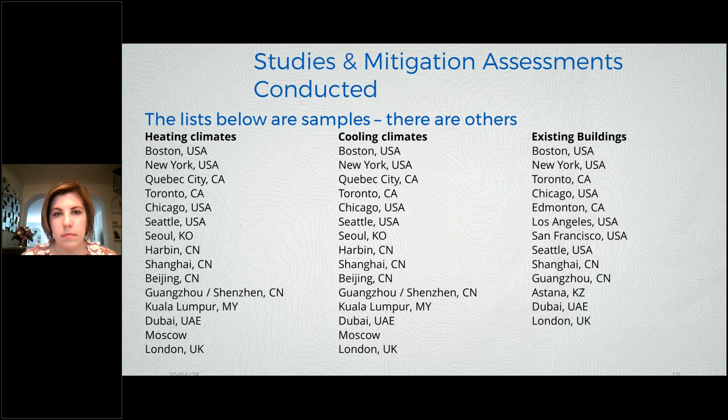I should note that I'm trying to be bilingual on our units. So there will be places where I think I've got every spot that there are IP and SI units, but if I slip up and miss one: 50 pascals is the same as 1 pound per square foot, 250 pascals is the same as 1 inch, and 1 inch is about 5.2 PSF. There's a little bit of rounding going on there, but those are basically the numbers. So 1 inch is 250 pascal, 1 PSF is 50 pascal.

And usually when we're naturally ventilating, the interior space is slightly warmer than outside. Even in a hotter climate, this is usually true. And so air wants to come in at the bottom and leave at the top. It's that delta P created by the indoor-outdoor temperature difference that starts to drive this force.

The issue with stack effect, though, is that there's really a driving force, and it's very difficult to get rid of that driving force. We will talk a little bit about how to get rid of it.

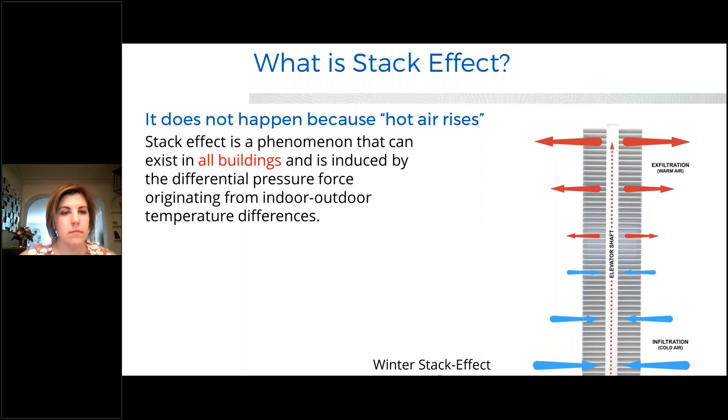When we start to talk about design, what we're trying to do is manage the severity of the impacts and make sure the design doesn't actually enhance the problems associated with stack effect. Usually what happens is clients ask us, how do I get rid of stack effect in my building? That's a legitimate question, but it's better phrased as: how do I reduce the frequency of it, and how do I eliminate the adverse impacts in my building? Because remember, stack effect for natural ventilation is a good thing.

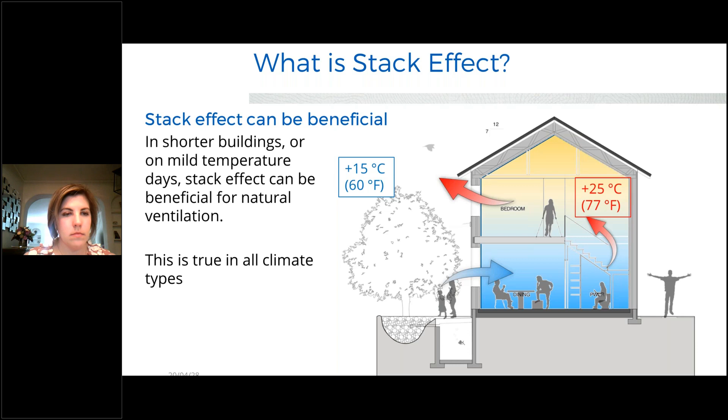So here's an example of a building in Denver. It's 44 stories, approximately 550 feet. On the day of the video I'm going to show you, it's about 10 degrees Fahrenheit outside, 70 inside. In terms of our language, this is moderately tall and it's not a particularly cold day.

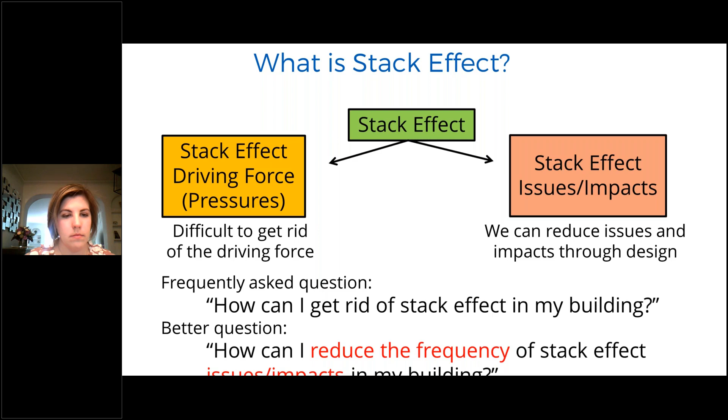And so often people will talk about, well, why do we need a rotating door? They're awkward to get in and out of, and it's true - they are more complex to get in and out of. But if they're designed well, they actually work really well.

But what ends up happening is if we don't have a vestibule, we don't have a mechanism to control stack effect, all of that cold air that was outside at 10 degrees Fahrenheit has just come in and swamped your lobby, and you don't have comfortable guests or residents anymore. And now all of a sudden we're into a much, much bigger ventilation system.

So there are a variety of potential impacts. These include things like whistling airflow through doors and cracks, difficulty opening and closing doors. I'll show you an example later on where I've been in cases where it didn't feel safe opening and closing a door. Difficulty controlling temperatures on some floors with excessive infiltration.

So there's an example with that door where that fellow opened the door and all that air's coming in. There are cases where we've seen that buildings could not keep themselves warm in the winter.

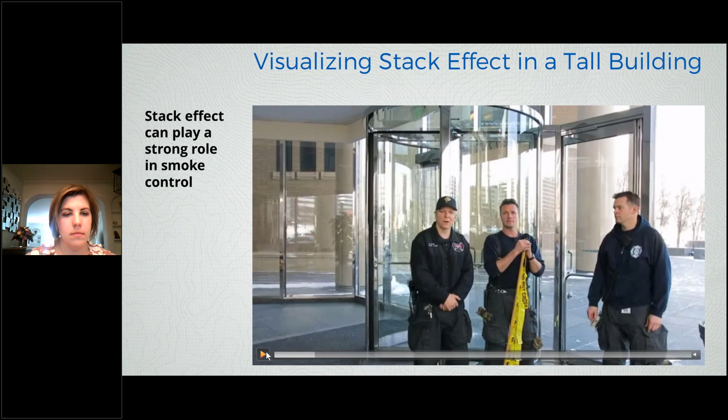Elevator door and operability issues. And what we mean by operability issues is the doors won't close. My experience on this is that at the bottom of the building where the force is coming in and pushing into the elevator shaft, that tends to be where elevator doors fail the most often. It's at the bottom of the building in winter where air is pushing into the shaft.

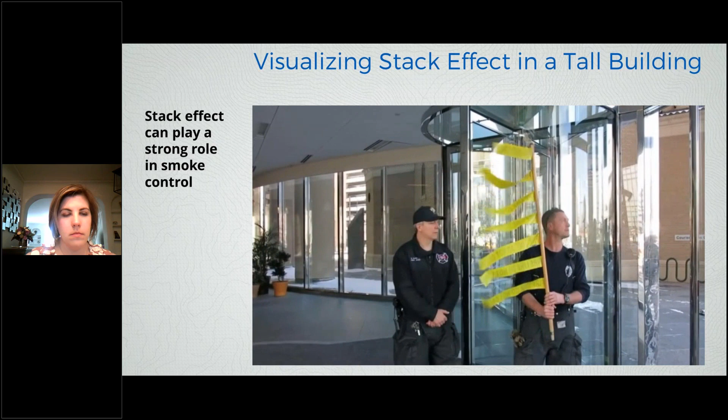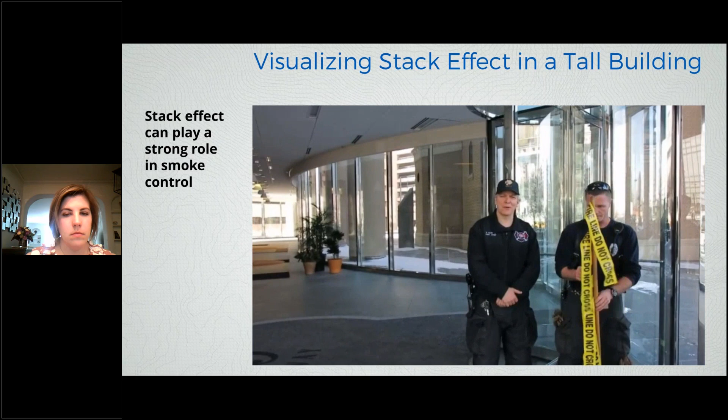I've seen at the top of the building nearly an inch of water pushing out on an elevator door, and that elevator door working just fine. So when I talk about criteria, that one's a bit awkward because we do have criteria and thresholds for elevator door operability, but it depends upon which way the pressure is working on the door.

And then, of course, the last thing is whistling. I'm sure everybody online has heard elevator doors whistling as a result of stack effect driven flows. There are increased building energy costs associated with uncontrolled airflow to the outdoors, and that has to do with all that excess infiltration that's going on.

There can be an ingress of odors from the outdoors, but also an ingress or migration of odors from one unit to another. One example I'll show you had toilet exhaust leaving the toilet, with odors entering into a different unit. This happens to be cigarette smoke, causing some concerns and a degradation in the enjoyment of that unit, so the residents were a little irritated.

So often that unit-to-unit odor transport is not only driven by stack effect, but also by wind. This comes back to how you set up your ventilation system, the risers and the ductwork, to manage the pressure forces created by wind and stack effect together.

So this is the moment where I explain why stack effect gets set up, using an example of a tube of water and a tube of air. In this example, the tube of water and the tube of air are sitting side by side, and you know intuitively that the tube of air is lighter than the tube of water. Now I'm going to connect them.

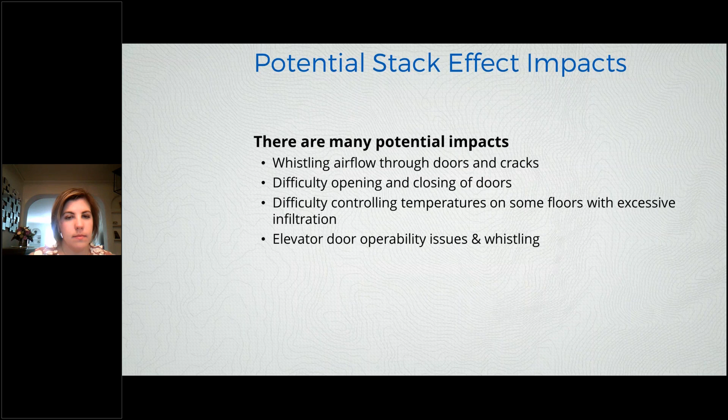When you connect them, you know that the water will travel this way and the air will travel that way. The reason that's happening is not because the air rises. What's happening is that the weight force of that tube of water is heavier than the weight of the air in the other tube, so it's just going to flip around.

Now, if you think about it, we infinitely cool this, so all of the air coming out here is instantly turned into water, or in the building example, the hot air is instantly turned into cold air because we have a massive outdoor reservoir. The water coming into the air tube, which is outside cold air, is coming into the building, and the HVAC system takes care of that and warms it up. So the system gets set up where we have this infinite loop: outside we're always cooling that escaping air, and inside we're always heating the air that's infiltrating in.

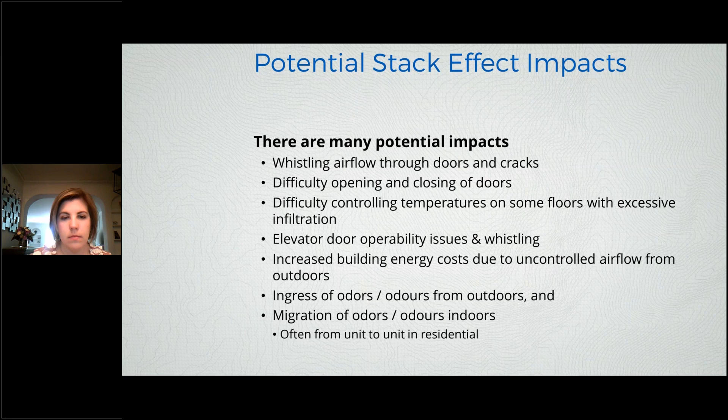Buildings are a little more complex than this, but this is how it gets set up. It's because the weight of this column of outside air, which is cold in the case of winter, is heavier than this weight of air here.

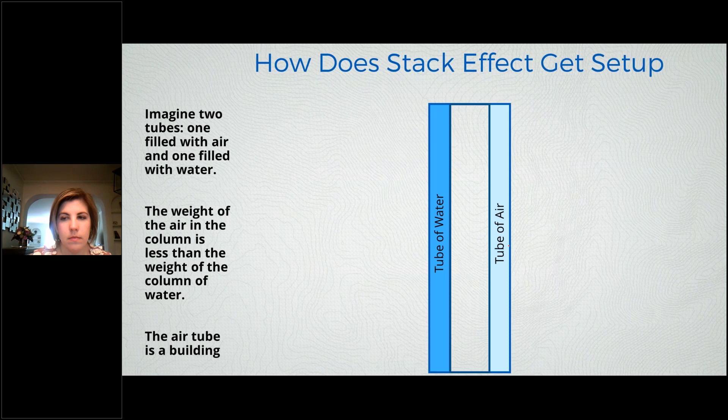The best way of showing that is with this example of a 1,300-foot building. Outside it's 0 Fahrenheit, inside it's 70 Fahrenheit. The mathematics on the two columns here describe this: we calculate the weight, or density, of the air mass inside and outside, and then the height of that density of air, which gives us a pressure force at the bottom of that column. This is where that 14.6 psf comes from — the difference in the weight of the columns of air inside and outside.

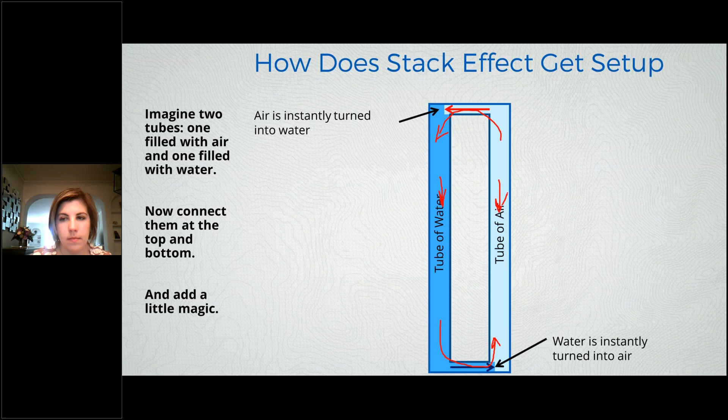This is the total pressure force difference, and that ends up getting distributed. Of that 14.6 psf, approximately 7.3 is at the top and 7.3 is at the bottom, which implies that the neutral plane, the point where we have zero, is somewhere in the middle. We'll talk about the neutral plane in a moment.

When we go to summer, it's going to be different. For the same building with the same reasonable set of temperatures outside and inside, we've got a 4.2 psf pressure difference, not 14. So in summer, the pressure forces are a lot less.

Let's go back and talk about — sorry, I'm just trying to point out here that the neutral plane is approximately halfway up in this particular example that we've used. We will come back to that.

Let's go talk about a few example buildings. These are showing some buildings that you will have heard of, and what we're looking at here is temperature on this scale and the occupied height of the building here.

And there's some buildings that you know very, very well. So the Burj Khalifa in Dubai, it gets cool. You'll notice that because of the height of the building and the outdoor temperature dropping to just below 60 degrees Fahrenheit, it ends up having what we're referring to as a moderately strong stack effect force.

Whereas when we get up to something like Willis Tower, it's very, very strong. It's actually severe. You can have a couple of inches of stack effect force set up strictly by that indoor-outdoor temperature difference. And the strongest stack effect force we've ever been involved in had a 4-inch delta P inside to outside.

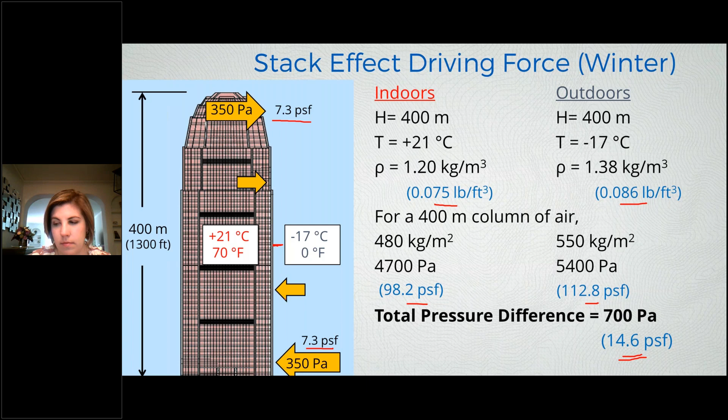In summer, Burj Khalifa clearly is winning just because it's taller and it's a lot hotter, but you can see that these buildings are candidates. That building in Denver that I showed you, for the conditions that exist there, isn't particularly strong stack effect. In terms of severity, it's about the same as Burj Khalifa, in the same class. The building in Denver just doesn't show up in this plot, because the temperatures don't get hot enough in Denver to show up on the plot.

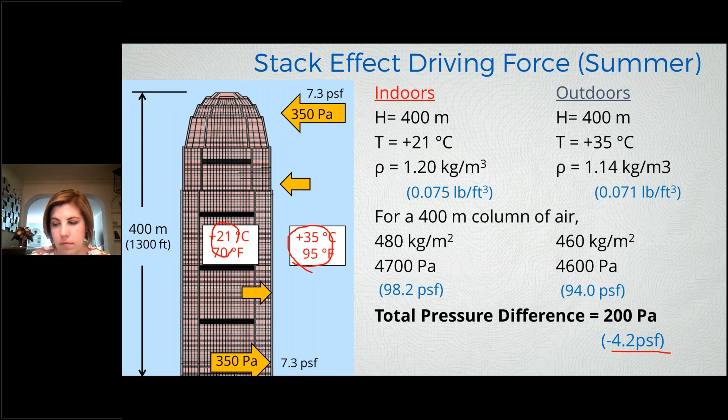If you want to put it into reference, 350 Pascal or 1.4 inches, that's what we're talking about on a door, which would require that you pull on the handle with approximately a 100-pound force. That's what it takes. The way you get to that calculation: you have a pivot point, a door, a handle that you're going to pull, and a pressure force on that door acting uniformly across it outwards. That's the force needed to start the door moving.

So the stack effect forces can be serious. Let's talk about how we judge problematic for a moment. There's a variety of thresholds, and often this is about how irritating stack effect is and then its severity. One of the thresholds we use is an operability threshold for a door.

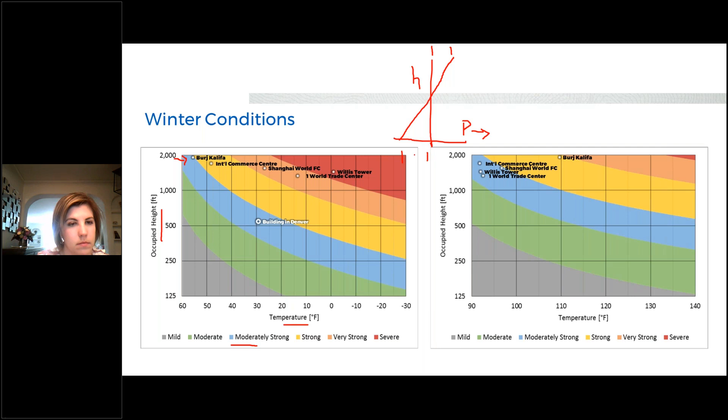If you look at NFPA, it says 30-pound force to set a door in motion. That's between 100 and 130 Pascal, or 2 to 2.7 PSF. That's the kind of pressure allowed on a door as a maximum. That's different from ADA, which is about an egress path, with a much lower pressure. That's why most buildings have a power door, because managing stack effect to get a 5-pound force on a door is virtually impossible. So the power paddles are absolutely necessary, whereas a 30-pound force is something we should be able to manage on most doors.

We then have elevator door operability, and we usually talk about 0.5 PSF, or a tenth of an inch. Whenever we see a number above a tenth of an inch on an elevator door, we start to flag that as a risk. That simply has to do with the variability of elevator doors across the planet.

It's difficult to judge because I've seen a door with nearly an inch of pressure on it pushing outwards, and the elevator door was working just fine. I've seen doors with pressures at approximately 0.4 of an inch pushing inwards, and it was fine. It was whistling like crazy, but it was fine.

So elevator door operability is something we start talking about at 25 Pascal. One of the examples I'll show you had exactly this issue.

We then talk about whistling through doors, and whistling is not so much about the pressure, it's the flow speed and the flow velocity.

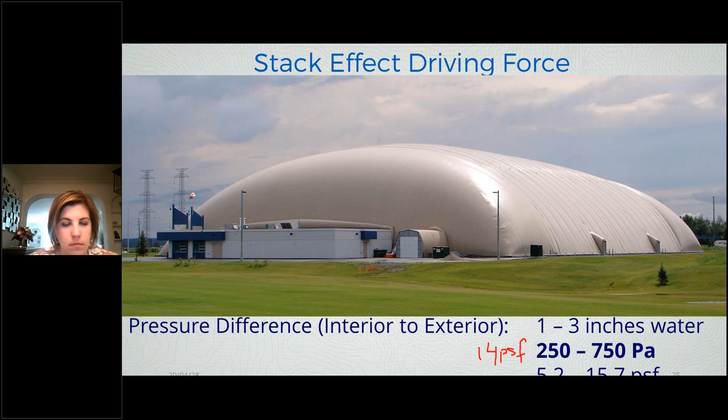So if you think about a door jam for a moment, this is like a zoomed in view of a door jam, and you have a door sitting here. If the pressure is pushing the door this way, it's sealing it, actually helping to crush the door against whatever seal we have there. However, if the stack effect force is pushing the door open, that will tend to push this away from the seal, and all of a sudden air can start to leak in.

Depending upon what kind of door you have, you could have a little resonance cavity where the latch goes, or you could have two planar surfaces where you can get a harmonic wave set up. So there's all sorts of different mechanisms that whistling can get set up.

Usually we refer to a flow volume rather than the flow speed, because it really does depend upon what type of door. Is there a hole for the latch? Is there roughness? What kind of seal is there?

One of the things people forget is that when this door is pushed away from its jam, often many seals start to fail.

In terms of another criteria, there's sometimes difficulty just balancing the HVAC system, or an inability to deliver fresh air to some areas. We'll talk a little bit about that too.

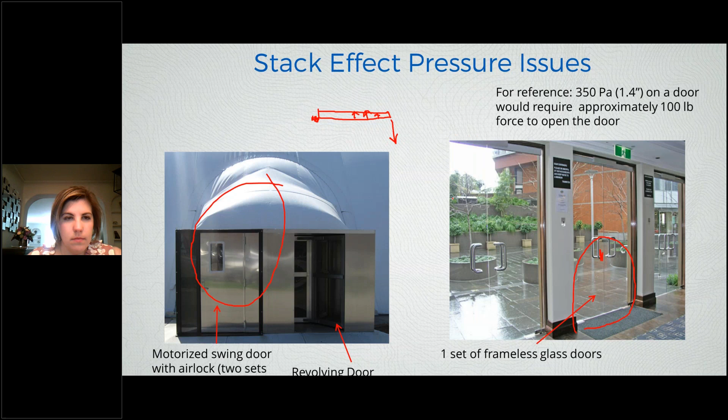In SI, this would be 310 Pascal, so we're nearly 3 times higher than the criterion for being able to operate that door. And in terms of the elevator doors, they're at 37 Pascal where we want 25, so these are also a problem. We'll talk about this example about mitigation in a little bit.

When we talk about elevator door operability, this is what we mean. The inner doors on the cab are closed, so they work fine, they actually don't see much pressure at all. It's these floor doors, as they're starting to close, that's the issue.

If there's a high pressure on this floor and a lower pressure in the shaft, as more and more of this door gets exposed, there's a higher and higher force pushing in. Usually what ends up happening is the runners start to bind, or they're just not flowing smoothly in the track, and the door senses something's in the way and stops working. We've seen some elevators that actually have a guard sitting there, and their job is to make sure these doors close - one of the consequences.

I had flagged that sometimes we see problems with buildings just not being able to heat themselves, and clearly it's about cold air ripping in through the course of the day. Sometimes this cold air is not necessarily coming in through open doors, it could be just leaking through really, really poor doors. I'll show you some examples of some poor rotating doors in a little bit.

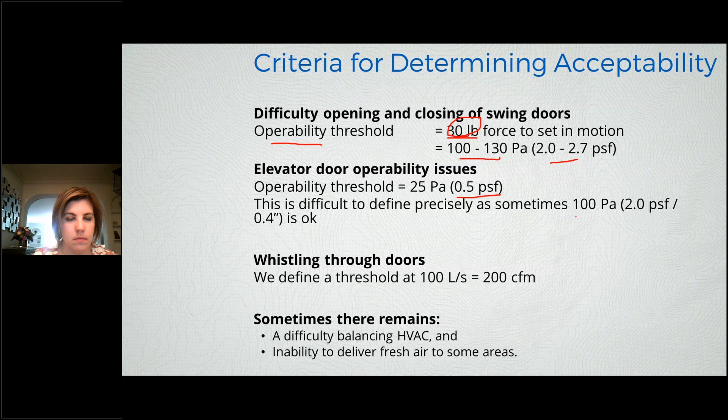When we talk about cold air coming in at the bottom of a building, that's sort of a similar analogy to a hot climate or summer condition, where we have hot air that's infiltrating at the top. So, personal story here, I was in Dubai.

I was on a treadmill at the top of a building, and people kept going in and out to go to the pool deck, which was on top of the building. Every time someone opened the door, 100-degree air came blasting in that was very humid, filled the gymnasium up with that air, made it very difficult to work out. The ventilation system tried to catch up, getting it back down to something reasonable in the upper 70s, and then poof, someone would go out again.

So that condition exists both in hot and cold climates. So let's talk about what and where the neutral plane is.

I think most people are aware that the neutral plane is where we define the indoor and outdoor pressure to be the same, so the delta P is 0. When I talk about delta P, I mean the indoor minus outdoor pressure difference. So if indoor is higher, it will be positive. If outdoor is higher, it will be negative.

In this example, I've got a building with an opening at the top. This could be a pool deck, some sort of terrace, or a vent at the top of an elevator shaft. What ends up happening up there is, because there's no obstruction between the inside and outside conditions, the delta P by definition is 0. So the pressures are the same.

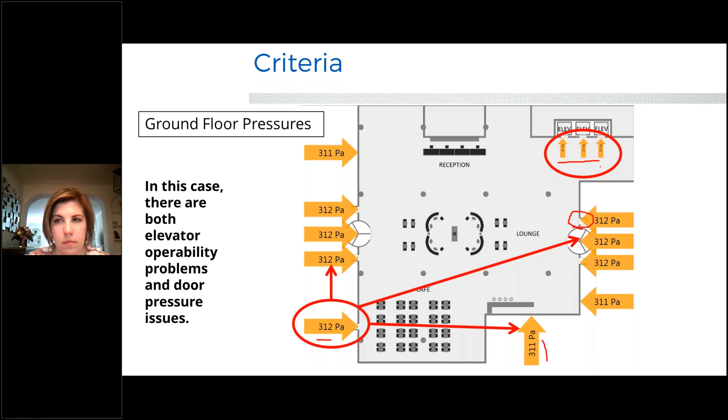When we actually look at a real building, there are distributed openings all the way up and down the building, and so the neutral plane is somewhere in the middle. Usually, in a neutral passive building with no ventilation system and no wind impact, we'd typically see the neutral plane at about 45% height. The reason it's not roughly at halfway is the neutral plane is actually affected by the size and types of openings.

So if you put a door down at the bottom and only have operable windows as you go up, the presence of this door will drag the neutral plane down a bit. So assuming the neutral plane is roughly at 45% height is a good starting point, but in this case I've just assumed it's at the 50% point. The slopes on this curve and this curve are the same—I haven't changed them, because that's just the change in pressure as we go up and down.

When I do an indoor minus outdoor pressure difference, I get negative at the bottom, so air wants to come in, and positive at the top, so air wants to leave. That's why that's set up. You can do all sorts of mathematics to prove this to yourself and be comfortable with it, but that's what I found is the best way of describing how stack effect gets set up and why those indoor-outdoor pressure differences are the way they are.

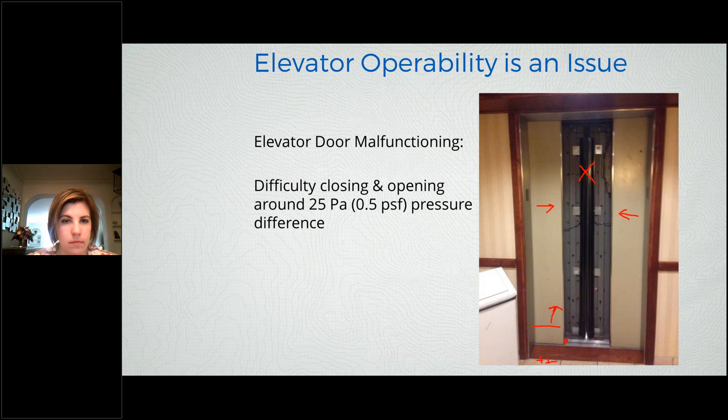When we talk about summer, what ends up happening is the slopes of these flip around, and when we do that indoor and outdoor pressure difference, indoors is negative relative to outdoors, so air wants to come in at the top, and air wants to leave at the bottom.

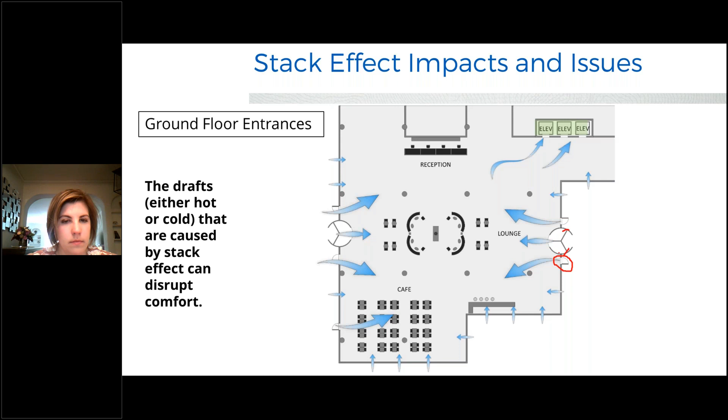And that's that sense of a hot condition where you have it reversed. When we start talking about natural ventilation, we can take advantage of stack effect.

In this particular case, I've got a building set up where we have a chimney, and the act of having this opening up here lifts the neutral plane up. The outcome of that is that the neutral plane, let's say, could be up here.

In order to get natural ventilation to work in this building, for these two rooms here, the neutral plane has to be above this opening in order for air to come in. If the neutral plane is not above that level, air will leave that opening.

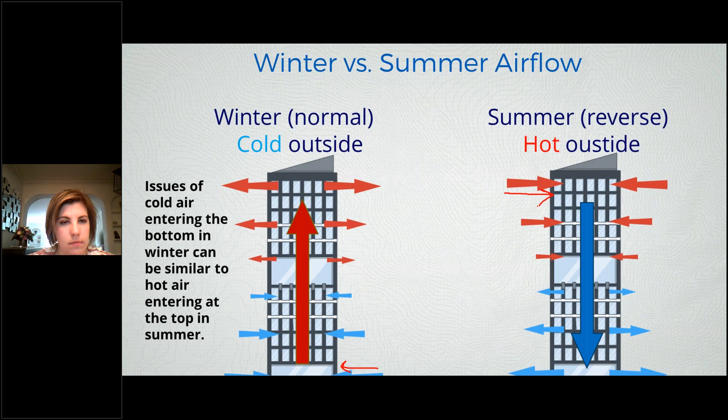When we talk about the overall natural ventilation, this room is isolated, so it's only got air coming in, probably wind-driven, and air leaving. This room is single-sided. I've got air that wants to come in here and leave there. It sets up its own neutral plane within itself, and again, it's isolated from the rest of the building. So this single-sided ventilation works.

But in this case, for these two rooms, because they're working together and they're connected to a chimney, we have to manage where the location of the neutral plane is. If we close that lid, what will happen is the neutral plane is now somewhere around the halfway point between the two openings, and air will come in here and leave there.

So if you're designing a natural ventilation system, it's really important to make sure that you can control your neutral plane. If you're trying to design, let's say, an atrium, and I've seen this done before several times, where someone's designed a building, they put a lovely large atrium on it, and they say they're going to bring air in at the bottom, and have air leave at the top of this atrium.

The air is going to rise, of course, these are well-behaved arrows. And then on every floor, as you go up the building, they will say, well, I'm going to have air that's going to come into this floor and air that's going to leave this floor, on every floor. That's rubbish. It doesn't work that way.

What will happen is that air will come into these floors on the lower half, below the neutral plane, and then above the neutral plane, air will leave. That's actually how it's going to work. So you've got to be really careful with your neutral plane and understand how the flows are going to go in the building.

So now let's talk about the effect of building pressurization. By pressurization, what I mean is that the net flow being pushed into a space is greater than the net mechanically removed flow. That difference, either positive or negative, is going to contribute to the perception of stack effect in the building. Overall, the HVAC system is contributing to the net pressures within the building.

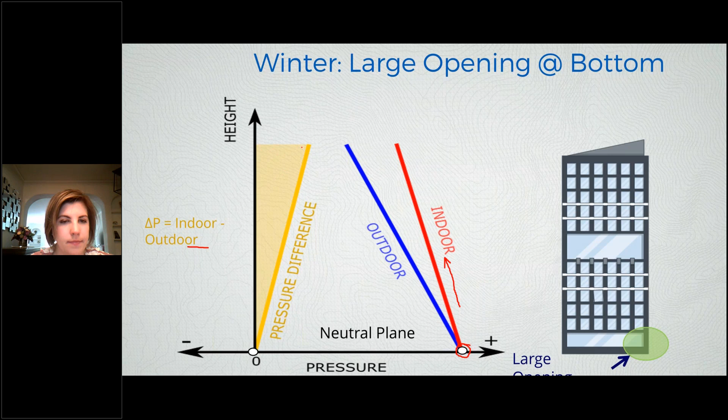Often what people think is, well, I'm going to control stack effect by adding some air in the lobby, without realizing that nothing's for free. The pressure has to increase at the top of the building, and increasing air only in the lobby floor may actually create other problems, and I'll show you that in a moment.

In the summer, remember the line goes the opposite way, and I have air that wants to come in at the top and leave at the bottom.

When I pressurize, I still push that line this way, and now all of a sudden I've got a significantly greater force at the bottom of the building than before I started pressurization. This is the example where what we do for winter stack effect to manage stack effect can work against us in summer. In a typical building, office or residential, the bottom is often very leaky relative to the top, so all this extra pressure at the bottom is likely to cause significant outflow. You may be better off gently pressurizing the floors, but not the lobby, because that lobby is going to see an outflow anyway.

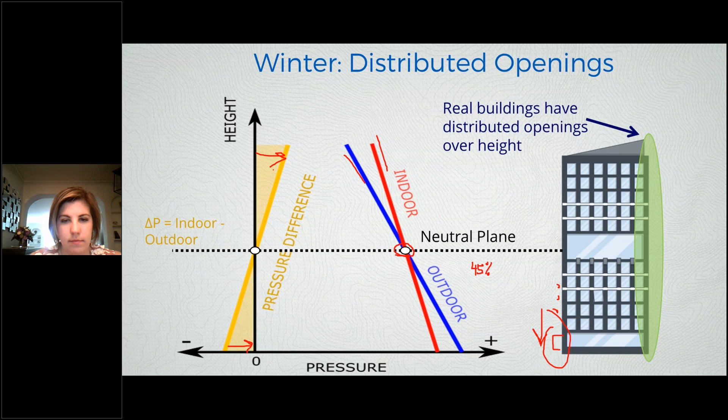The other thing to note is if you undersupply a building - say you have a residential building with toilet exhaust, dryer exhaust, kitchen exhaust, and you're centrally supplying makeup air but don't have enough - the building will go negative. This is the new curve, the force at the bottom of the building, and air wants to come in. A lot of air comes in at the bottom to feed the fact that the building is negative from an HVAC perspective. People perceive this as a stack effect problem, and it looks like one, but it's actually associated with the HVAC system. You have to be careful diagnosing these problems, not to fall into a trap of just taking some measurements and being done. I have an example of that too.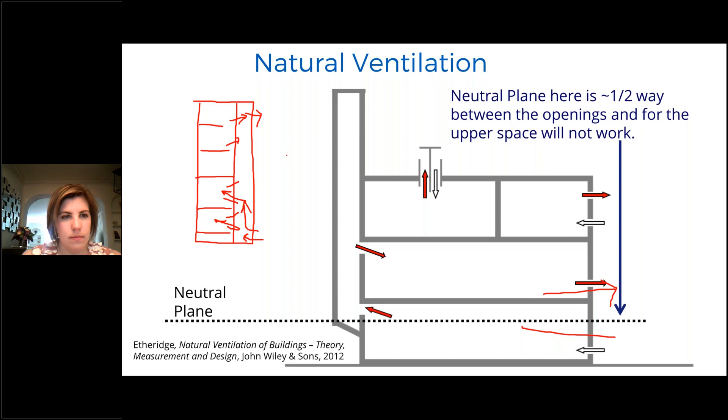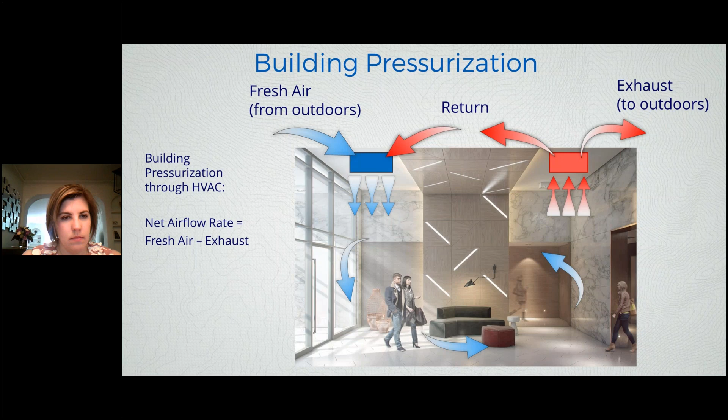So this is with no mitigation. The first thing is if we improve the facade - we tighten it up and make it better. The pressure has gone up on the facade, so now my pressure's gone up. The facade is doing more work, which is great. The elevators are now seeing less than the criterion, so they're at 0.4 PSF, so that's good - they're under control and will work without a problem.

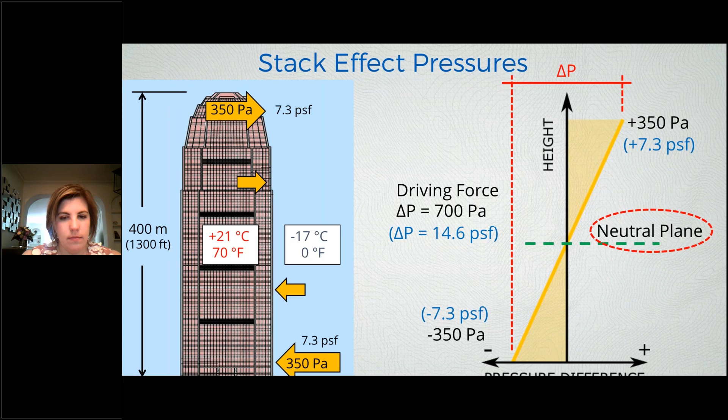But I've still got a problem on my operable doors - these doors will still have a problem. If I put vestibules on those doors, the vestibules will help, but because of the strength of the force on the facade, a double vestibule isn't going to do it. You'd actually need to put 3 doors in a row to bring each door below the 130 Pascal pressure requirement. So a vestibule here isn't going to be the only solution.

You could positively pressurize the lobby. As I talked about earlier, often what we do is stick in some extra force or extra pressure in the lobby. If you do that, you will increase the pressure in here, which is phenomenal because you've solved the problem. All of a sudden the pressure force is now significantly less, but you've moved all that pressure to the elevator doors or to the building up above. Nothing is for free, and in this particular case the total is still the same.

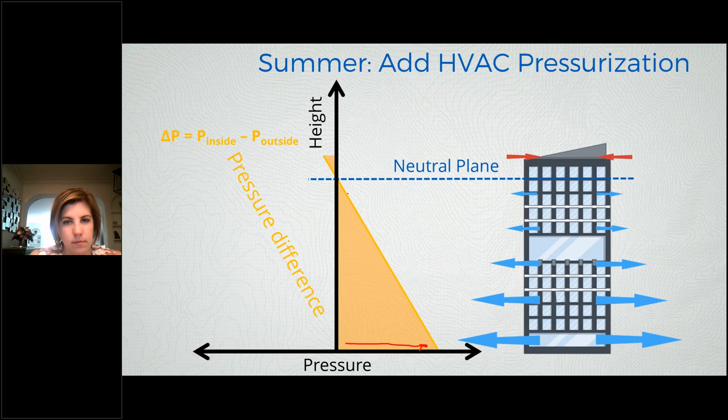So if instead of pressurizing the lobby, you pressurize each of the floors a little bit, what ends up happening is you even that out, and now the elevator doors are happy, as are the front doors, and all that's happened is a little bit of positive pressurization on all floors. This is a much, much better way of doing it. The reason you might positively pressurize the lobby is to deal with infiltration, but that doesn't mean you have to - you could actually just put that on recirc. So adding a little bit of pressure on all floors is actually a better way of going.

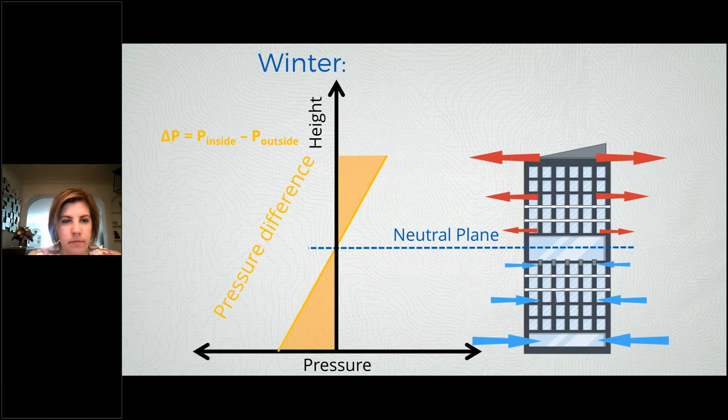The challenge with mitigation is that this is kind of like trying to plug a leaky dam. When you try to manage stack effect, if you're going to seal a hole or put a better door somewhere, you really do need to make sure you get all of the holes in the facade, or do better doors everywhere.

The analogy here is a water balloon with little holes in it. A better analogy: this past weekend I was out trying to seal the fence to prevent little bunny rabbits from getting into the veggie patch. That bunny is going to try and get in any single hole you happen to have in your fence, and if you put a lot of effort into one hole, the bunny will find the other hole. It's the same with stack effect. You've got to even out your effort so that you cover all of the holes well, rather than focus all your effort on one. So don't just focus on the front door, because if you fix the front door, the problem could arise somewhere else.

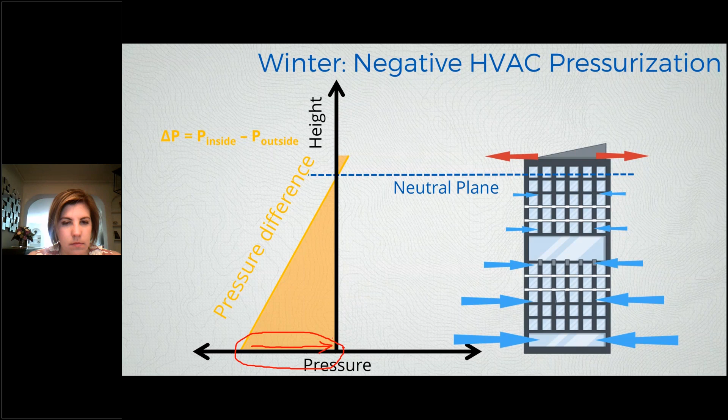The challenges with mitigation also depend upon where you are and what kind of buildings you have. If you have an office building, you get high occupant traffic during rush hour. If you have a residential building, the residents have operable windows and maybe doors and exhaust vents, and the occupant behavior of leaving windows open means your facade is immediately compromised. So you have to have a backup, assuming your occupant is going to leave their windows open.

If you have a mixed-use building, then you have different types of owners and different operations. Usually what ends up happening is we have a layered approach where we have retail at the bottom, maybe an office, a hotel, and residential. Ideally it would be the other way around - retail at the bottom, then hotel, residential, office, with the office at the top of the building, because it's usually tighter. But there are many codes in many jurisdictions, New York being among them, where you cannot do it that way - you cannot have office above residential. And at the bottom of a building you could have a podium, which can connect to subways and shopping, so often the bottom of a building is incredibly porous. This makes it a bit of a challenge.

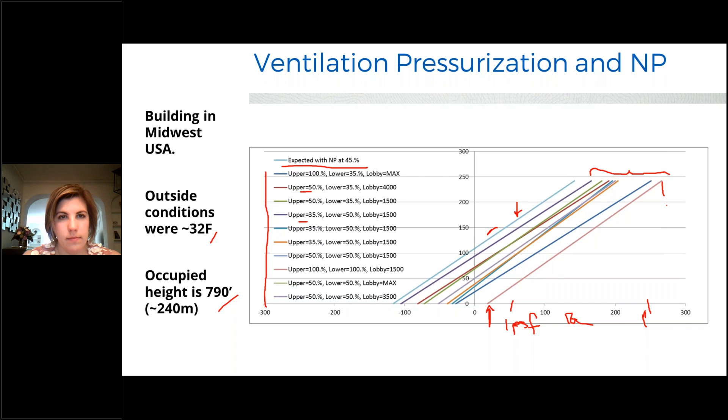So I'm going to now talk about two case studies. One of them is a building in Shanghai, a 40-story office building. It has operable windows and three lift cores, or elevator cores.

My apologies if I occasionally switch into using the word lift. It's just shorter and more efficient to say.

So we have 3 elevator cores: a high, a medium, and a low elevator core. This diagram shows that the low-rise elevators touch all of these floors, the mid-rise touch all of these floors, the high-rise touch all of these floors, and the service elevator touches all of the floors in the building.

The issue here was that the high-rise elevators on the ground floor would not operate when it got to semi-cold, semi-cold being 40 degrees Fahrenheit. The elevators just wouldn't run - the doors would seize down on the ground floor.

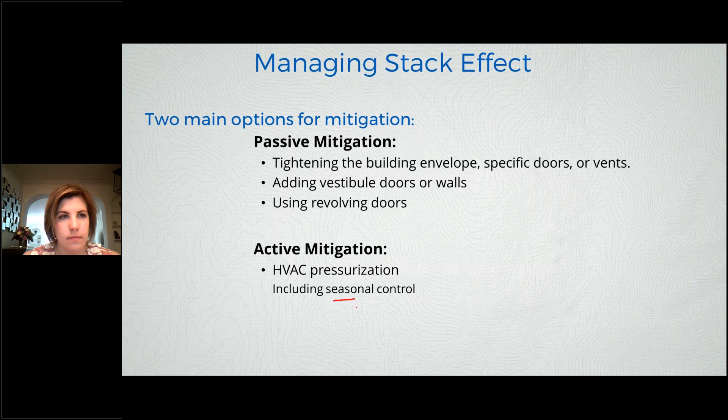So what the building operations did is they actually kept 2 of the high-rise elevator lobby doors open. There was an elevator bank here with 3 cabs on this side, and another elevator bank over here with 3 cabs on this side. At the top of the building, these 2 sets of elevators shared 1 machine room - these were the high-rise lifts. They forced this door to remain open and this door to remain open, which meant that the delta P between the lobby and these elevator shafts was effectively 0 because these doors were always open. That was their solution.

But because they were trying to hand the building over to the owner, the developer wanted to give it to the owner, who was saying, well, I can't use all my elevator shafts, I don't want the building. So they had us come in and we went and took some measurements.

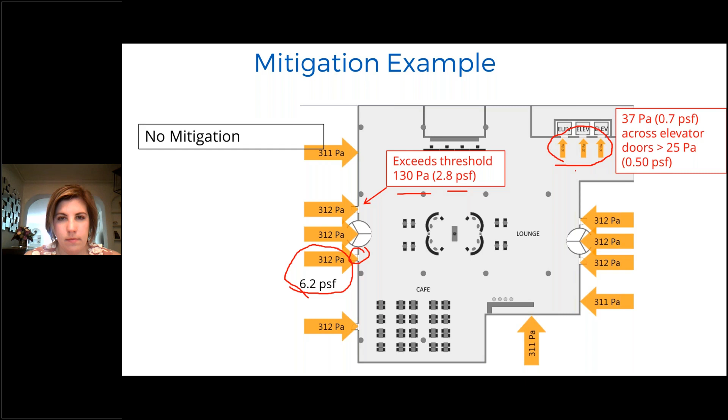What you're looking at here is the measurements on the high-rise elevators across the elevator door. On the lobby level, this is the high-rise lobby, this is the mid-rise lobby, and this is the low-rise lobby. And these were the pressures on the upper floors where those doors happen to touch. You should note these are all in Pascal.

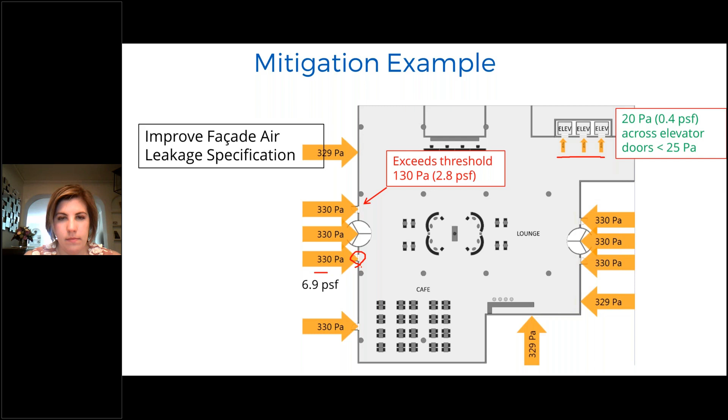So what that ends up meaning is that we have a very, very leaky facade. When we actually measured the pressure on the facade, we were getting a lower pressure being taken up by the facade than we were the elevator doors. That's a problem.

So in this case, we have 2 options. You can either seal the facade, which would do it, but there's no guarantee. Back to my bunny rabbit example, you've got to be able to seal every single hole in the facade, otherwise it's not worth sealing any of them. You could seal all but 1 hole in your garden fence, but the bunny rabbit will find that one way into the veggie patch. So you either seal all the facade or you don't bother trying, and that would mean wrapping this place with a saran wrap.

The other option was to create a vestibule for the high-rise lifts, and there's no guarantee that this would actually be a solution.

We actually went and had a look at what would happen if we put a rotating door vestibule on the high-rise lifts, and what would end up happening is it would actually increase the pressure on the mid-rise lifts - the problem would just transfer somewhere else. That would then end up meaning you'd need a vestibule in both the high-rise and the mid-rise elevator, so all of a sudden you're into double the cost that you were anticipating.

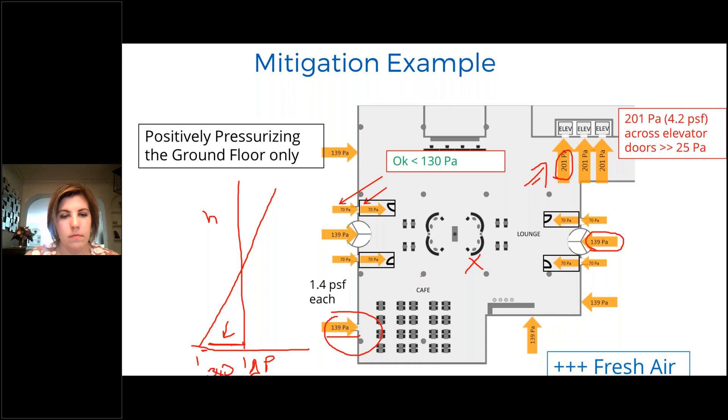So let's talk about another example. This second example is in the Midwest US, a building with a range of challenges, including that under not very cold conditions, 32 degrees Fahrenheit, it was experiencing strong stack effect problems. The elevator doors were whistling, and there was significant flow entering the front doors and into the elevators. They had trouble keeping the front lobby space warm. There was transfer of cigarette smoke between units via the toilet risers, so the toilets were a source of smoke odor transport between units. There was difficulty closing the elevator doors, and high pressures on some unit doors. This building had operable windows on all floors, centralized makeup air to the corridors, centralized toilet exhaust, and it was net positive.

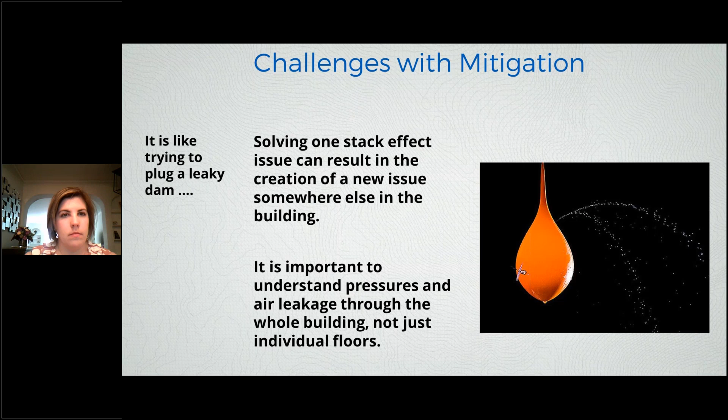In terms of how the elevators stack, the low-rise elevators shared a shaft with the service elevator, which immediately compromises our ability to segregate the building, so there were no zones. The high-rise shafts shared their own shaft. On the amenities level, all of the elevators in the building touched that level, and then the upper part of the building had just the high-rise elevators and the service elevator touching it.

What we did note is that when measuring pressure at the bottom of the building, the facade was only taking up a quarter of what the elevator doors were doing. This was because the lobby was being pressurized directly. And if the lobby is pressurized directly - remember the example I showed earlier - it shifts the forces to the elevator doors and takes it away from the facade. So that was part of the challenge with the elevator doors not working.

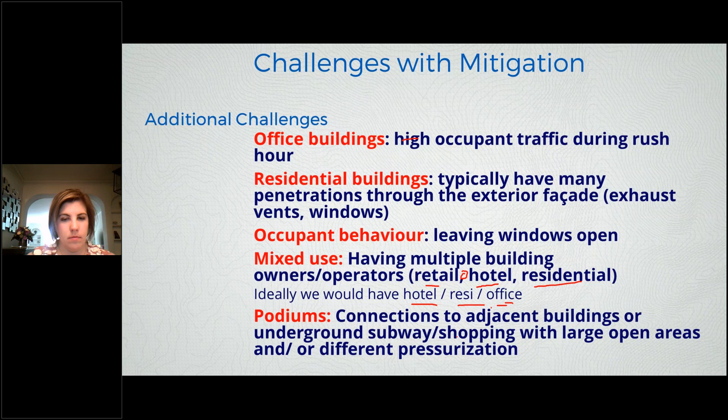At the top of the building, way up here, we were getting very strong pressures. The facade was taking up most of the pressure, 165 pascals, so over half an inch, nearly coming up on three-quarters of an inch. Whereas the elevator door was almost zero pressure, so the facade was doing the work and the elevator door was not taking up any pressure.

However, when the facade opened up - at this particular level there was a door to the outside, directly from the elevator lobby - when that facade door opened, all of this force was immediately transferred to the elevator, meaning the elevator door had to take an awfully large pressure. This was the example of the elevator that would take an inch, because we bumped up the pressure in the building to see what would happen elsewhere. And the neutral plane was at the amenities deck.

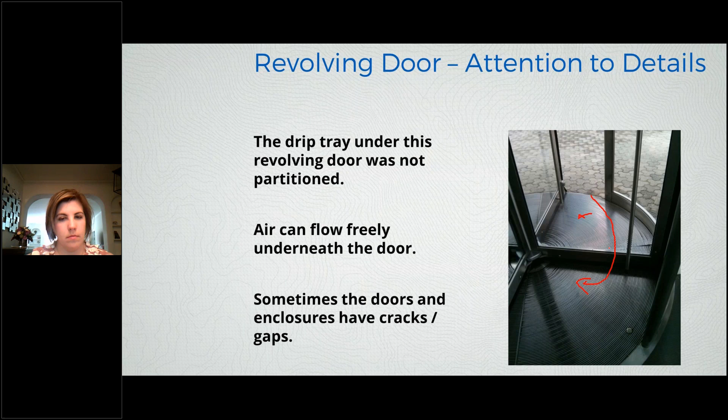When we think ahead about the ASHRAE 99.6% temperature when it's really cold, on the order of -1 Fahrenheit, the kind of forces we would see across this building would be nearly 2 inches. And 2 inches across this building would be enormous.

If we look at the ventilation system working on it, this is what we would expect as the neutral plane location, but given the ventilation system is operating, we would see on the order of 1.25 inches at the top of the building. That's an enormous pressure, especially given there's a door up there, and the force on that door would be very, very strong.

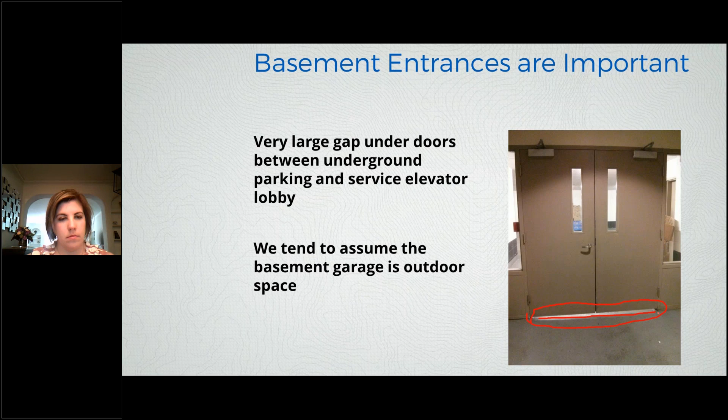Virtually impossible for an individual to close by themselves. The way we were closing it was with basically a glass grabber, a suction cup on the top part of the door, and someone operating the handle. It actually took 2 people to close the door.

What we ended up doing was looking at a couple of issues. One was the lobby pressure distribution. What was happening was that the facade was carrying very little pressure and the elevators were taking it all. That was because the facade either had a hole in it or the HVAC system was pressurizing the lobby. When we looked into it, it turns out it was the HVAC system.

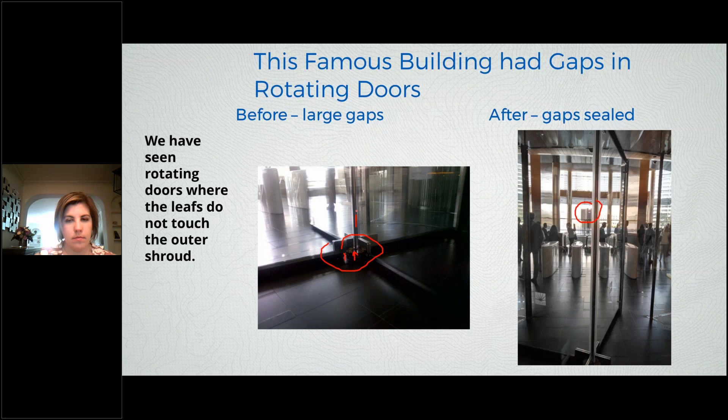The mitigation in this case was to try and rebalance the pressurization in the lobby and change the behavior so people weren't turning that one up because they thought it would make it better at the front door. It was just moving the problem to the elevators.

The next issue was about the toilet exhaust being positive to some units - the transfer of odor from a unit to unit is clearly a problem. What was ending up happening here was the toilets were set up with 50% diversity. That's okay, I'm not critiquing that. But the flows into each unit were based on the floor area of the toilet, and the fans were struggling to keep up. We did some modeling.

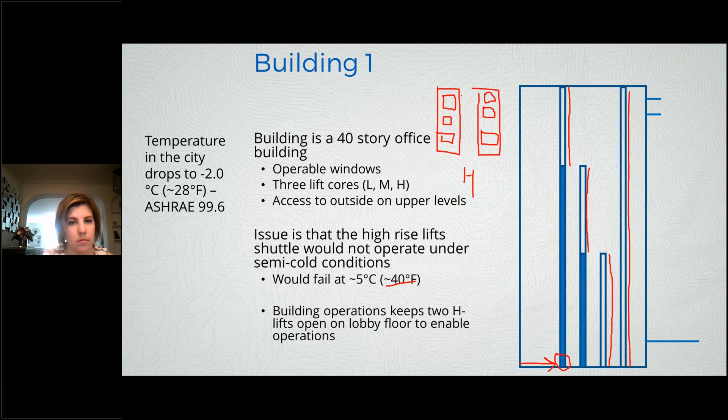In this particular case, the exhaust fans are on VFD, so that's fine. But there's a sensor located in a duct near the fan and another on an arbitrary hallway. We really need to move the sensors to places where we know absolutely that they're going to be reporting what we need. We need a sensor at the far end of the toilet riser so that we know that is negative with respect to the hallway. So it's about making sure your control setup is really important.

Then the last issue was the unit door pressures. We were measuring pressures on the unit doors that exceeded what we would call a safety level. When a unit resident opens a window, the facade doesn't hold the pressure anymore, and the pressure that's normally held by the facade moves to the unit door. We measured 165 pascals, so that's on the order of 0.6 to 0.7 of an inch on an upper unit door that was 24 square feet in size. So the force to actually try and close that door was enormous.

That's on a unit door. So think about a small child, a smaller individual, trying to move that door or trying to prevent it from whacking into them when they open it. That can be a problem. So we've got to be careful with high pressurization rates at the top and bottom of the building to make sure those don't exacerbate any issues.

The final issue I'm going to talk about is at the top of the building, at level 78, there's a lift machine room. So the elevator machine room is here. Of course, that means there are holes to the shafts below, so this room is directly connected to the bottom of the building.

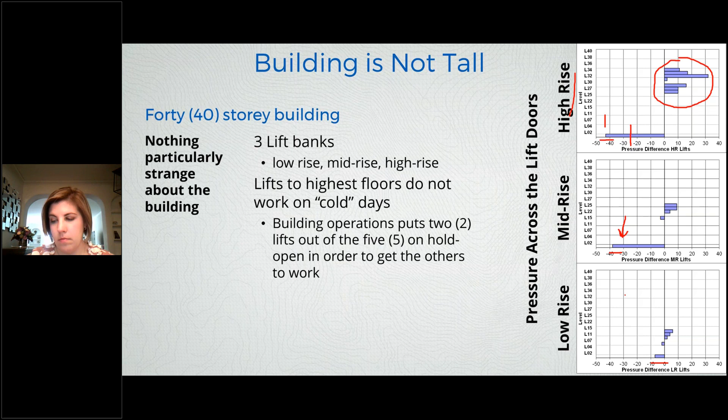We found that this space, which should have been interior space, had doors to the stairs and a door to a semi-outdoor space. But this space was behaving like it's external, and it meant the force on this door was 3/4 of an inch of water, which made it very difficult to close.

In this particular case, this is about diagnosing and trying to figure out why what should be interior space is actually exterior. It just turns out some poor choice of fan components and some unawareness of how fans were operating and opening dampers led to this being an outdoor space.

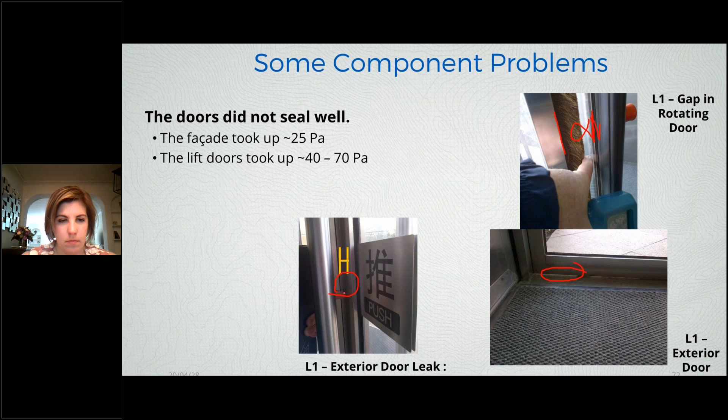In this particular case, the stairwell was carrying a similar pressure, and so that stairwell actually became very, very difficult to open and close as well.

So I'm going to stop here. I think if I'm going to close this up, there's three things I need to highlight for you. One is that stack effect's going to exist in a building that has a different temperature from outside, no matter what. And there are things you can do to mitigate it.

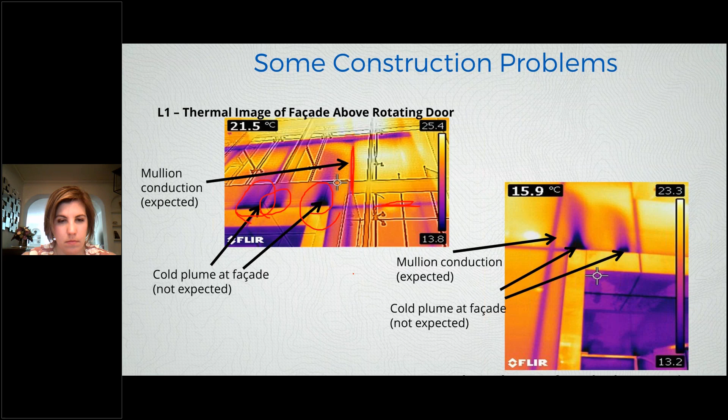I promised to let you know how to eliminate stack effect. The way you eliminate it is basically to get rid of the temperature difference inside and outside. But that's not the entire building, it's actually the shaft. If you can make the shafts in a building have the same or similar temperature to outside, you significantly reduce the stack effect driving force.

I don't care what the temperature is on any particular floor. What I care about from a stack effect perspective is what the temperature is in the shaft. So if I can manage the temperature in the shaft, then I can start to manage the overall stack effect driving force.

Clearly, if you're going to try and manage the stack effect forces by changing the temperature in the shaft, that's going to change the design of that shaft. So all of a sudden we're into insulation on the shaft wall. You might have to heat or cool the elevator cab, and you can't put piping in there because it may get cool. So there's a whole bunch of things that have to be taken care of, but it is possible to eliminate stack effect in a building, it's just got to be done from the beginning.

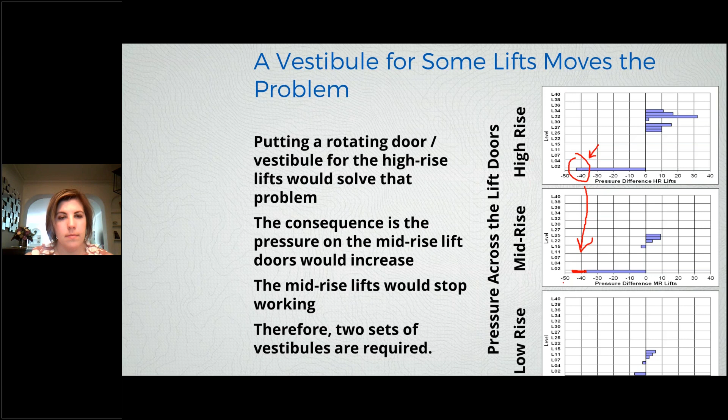So the first question is, do you use multi-zone network airflow models to study the more complex problems? Yep. Big shout out to NIST at this point, and I know the fellow who did a lot of the coding for CONTAM. We use CONTAM for multi-zone network flow modeling, and the examples I was showing were all analysis driven by CONTAM.

We have our own front end, simply because we find the CONTAM front end a little awkward to create complex buildings in, but you can do it. And I know there exist front ends for CONTAM that you can buy, rent, or license as well. But the engine, the solver engine in CONTAM, is awesome.

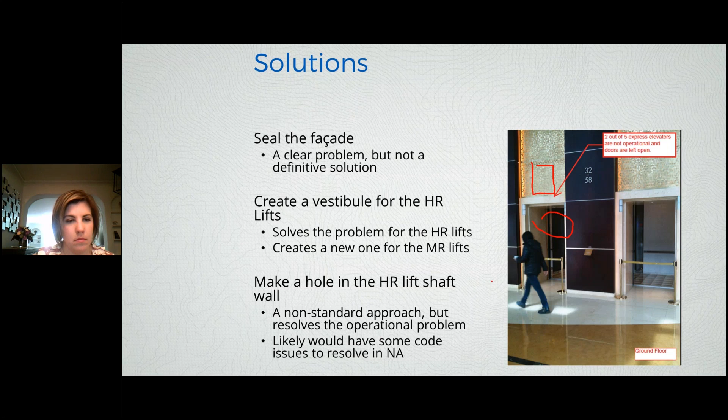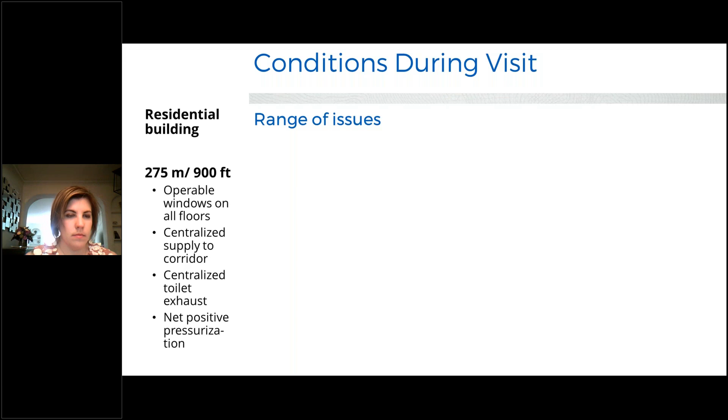It really is fabulous. There are some people who use CFD to try and do stack effect studies. That can work, but it's probably a lot more effort than necessary to set up a CFD model to study stack effect, where something like CONTAM can happily do that for you a lot quicker.

These two questions are related, from two different participants. One would like to know how do you measure the pressure difference across the facade in an existing building without disturbing the facade. And another participant would like to know what instruments do you use to measure the pressures.

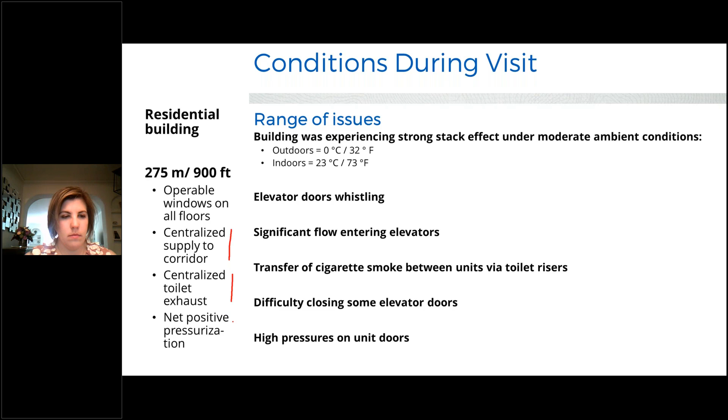Okay, so I'm going to draw for a minute. Yeah, the question about Schrodinger's cat, and measuring something changes it.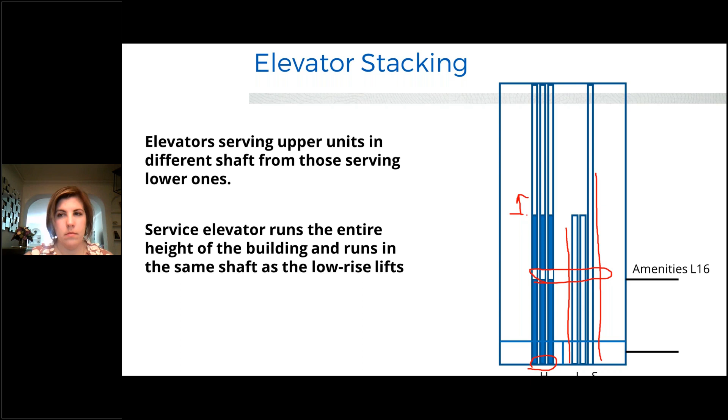If this is my elevator shaft, this is my corridor, and these are my residential units, let's say this is a nice building with 4 residential units and a door on each unit. I have to measure the pressure from the elevator core to the outside through every single element that might block the pressure. So I've got to measure across the elevator door, across the unit door, and across the facade.

Usually measuring between the elevator doors isn't a problem. You just jam your manometer tube past the doors. The doors might object a little bit, but you can usually do it. Same thing with the unit door - you can usually jam something underneath the door and close it tight, such that you've still got enough of a gap for your tube.

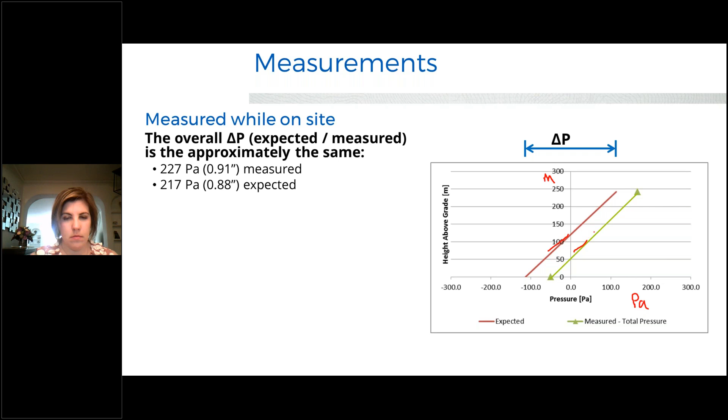The facade is the most difficult one - I'll save the best for last. Usually what we do is find a door that's got a small opening in it anyway, or stick the tube underneath and pull the door closed. If you close the door tight, as long as there's enough of a gap in that tube for air to slowly pull out or push in to equalize the pressures, you'll get a decent pressure measurement. If you crimp the tube completely, you will not get a decent measurement.

So the other way to do it is to take an absolute pressure here and then take an absolute pressure out there and subtract the two. That will give it to you.

An absolute pressure can come from a variety of tools, but there are barometers that will allow you to take an absolute pressure. The challenge with using a barometer is usually they're not as precise as a manometer that's taking a delta P. So when I was presenting plots like this that we had taken in a building, we always take a minimum of at least 2 pressures, usually the facade pressure and the elevator door pressure. And if there's a unit door in the way or something else, then it would include that as well.

So I think that was 2 questions - how do you take it across the facade, and what's the instrumentation? So there are 2 pieces of instrumentation I had flagged. One is a delta P manometer - there's a variety, and if you go on Amazon, you can find them. You're looking for a manometer that's taking delta P's, and the kind of range you're going to need is plus or minus 2 inches.

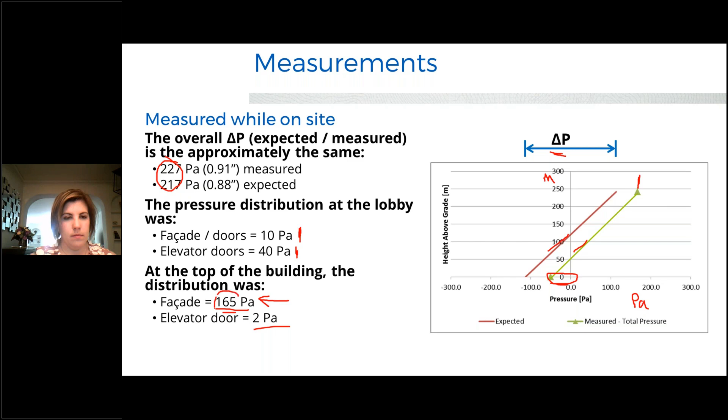The other option is to have an absolute barometer - anything you have on you that measures altitude. Some people's watch measures altitude by pressure, or a temperature gauge that might measure altitude. Those are actually reading a barometric pressure, so you can use one of those and convert it. You just need to make sure you understand where the reference is.

But if you stand inside a building and take an altitude measurement, then walk outside the building, close the door and take another altitude measurement, the change in altitude is actually purely associated with the delta P that you measure. So you could use that as well.

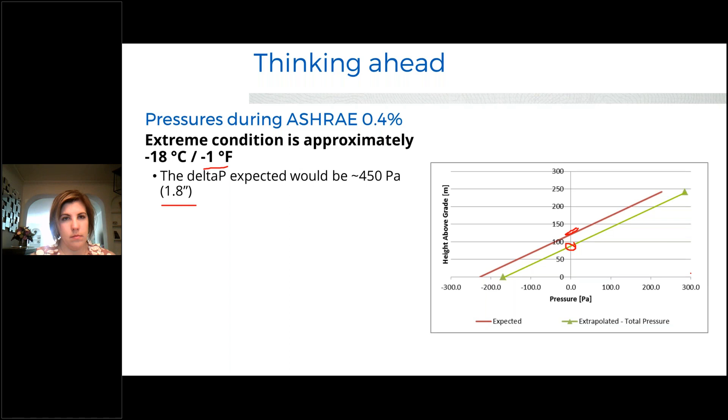Next question is, what is your experience using constant air regulators, CARs, for balancing air outlets, toilet exhaust, kitchen exhaust, outdoor air for high-rise residential? And please also reiterate HVAC balancing measures to mitigate stack effect.

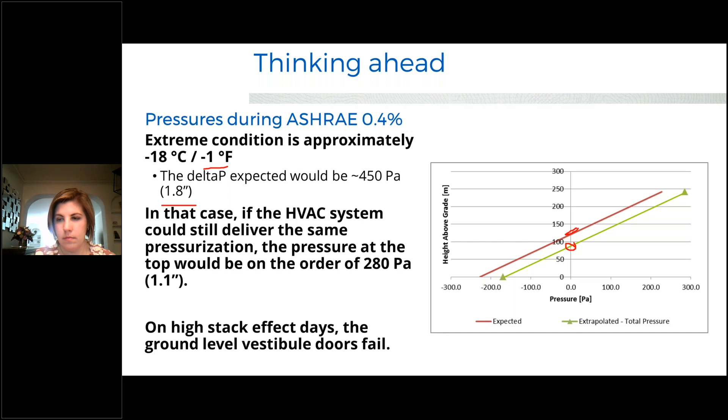Another clean page here. So, constant air volume regulators make an awful lot of sense. Bear with me while I draw that up for a moment.

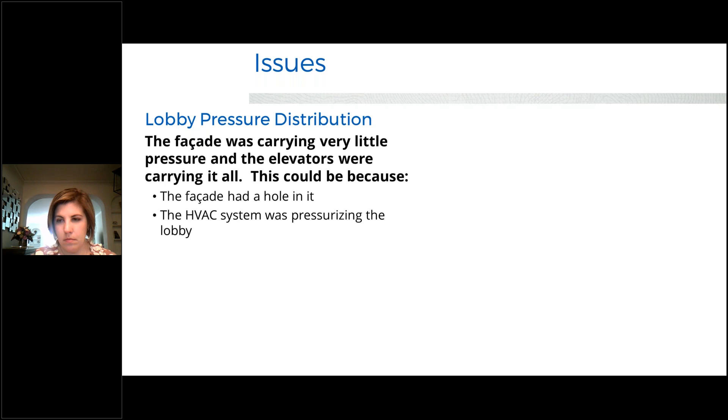If you have a building, let's put an elevator shaft in the building. It's a straight line, and we know in this building that this is the delta P. I've consciously put the neutral plane a little bit lower than halfway. If you're trying to push air into this building through the HVAC system, you're going to be working against stack effect forces.

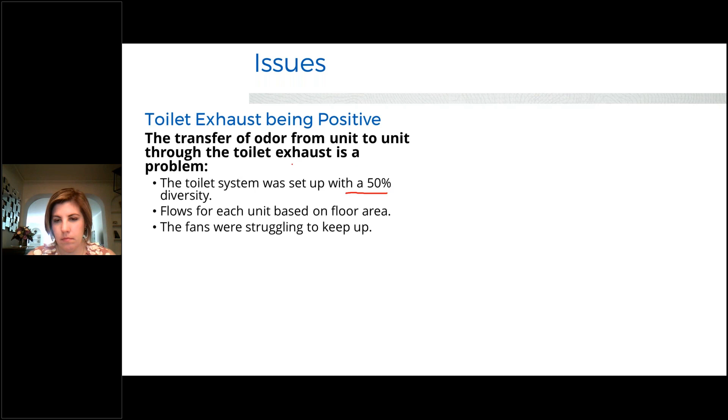Now let's talk about different locations. New York seems to have a method of designing residential units that is different from Toronto and different from Chicago. For example, in Toronto, these residential units will all have through-the-wall energy recovery ventilators. These ERVs will penetrate the facade and have a little fan in there and a backdraft damper.

This is in Toronto. In Chicago, what happens is there'll be an operable window on this building. There'll be makeup air into the corridor, and then there'll be a centralized toilet exhaust pulling air out.

So now imagine if I've got one riser for toilet exhaust that runs the height of this building—it doesn't have to be tall—and I open a window here, and I open a window up here. This open window at the bottom of the building may actually pressurize the toilet exhaust riser so much that the fan isn't able to keep up, so what ends up happening is I get toilet exhaust leaving up here.

What a constant volume regulator will do is stop this open window at the bottom from overpressurizing that riser. So they can be very useful. If you know they're going to be reliable and can take the pressure, they can make it so your toilet exhaust and makeup air isn't being overdriven or underdriven. This then helps you with balancing once you start getting into it.

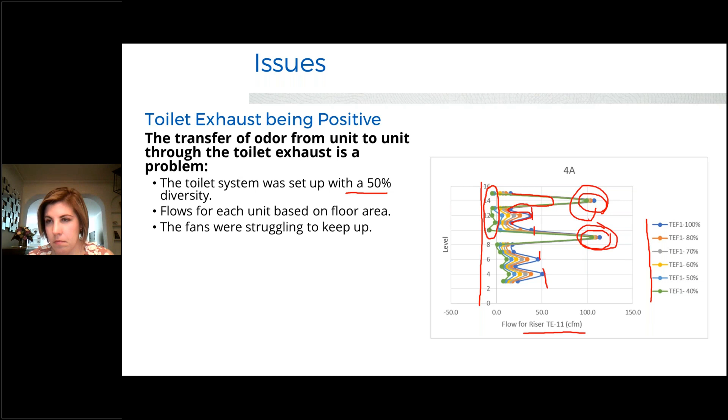Sometimes in some buildings there's one or two fans dealing with multiple risers that handle different stacks of units in a building. If I look at a floor plate—let's say I have a floor plate here with a bunch of units on this floor—all of them have at least one toilet. I might have a stack of toilet exhaust here and another stack here, and so on as I go up the building.

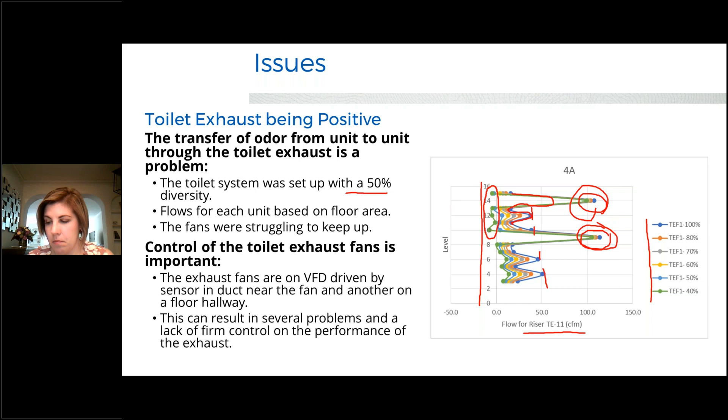But what ends up happening is on one floor they're all connected somewhere, and the way these are connected becomes an issue, because that particular branch may end up taking the risers from multiple parts of the building. So when you try to balance this, it gets very, very difficult. And when you throw stack effect pressures on it, all of a sudden it can't keep up.

So you're better off making sure the connections from all the risers to the fan, if you're using multiple risers on one fan, are all the same—that the paths are all the same—so you can better control the pressures in the risers at the fan rather than controlling branches as you come off. So there are two things there.

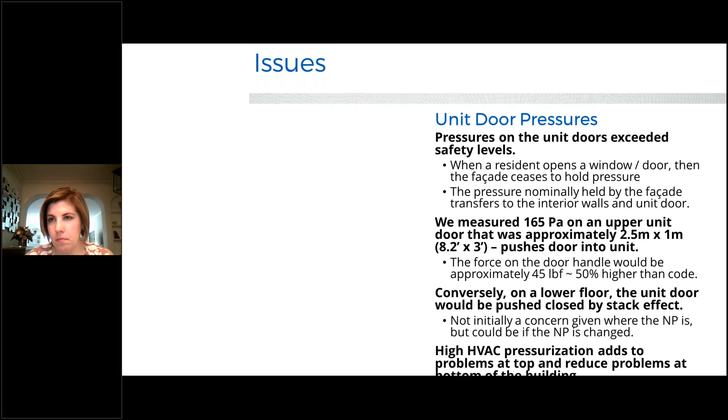One is that constant volume, constant flow dampers are really useful. And the second thing is you can make balancing a lot easier if you keep the branches the same and minimize the connections as a duct goes out to the riser. I hope that answers that question—there's a lot of stuff in that to answer it completely.